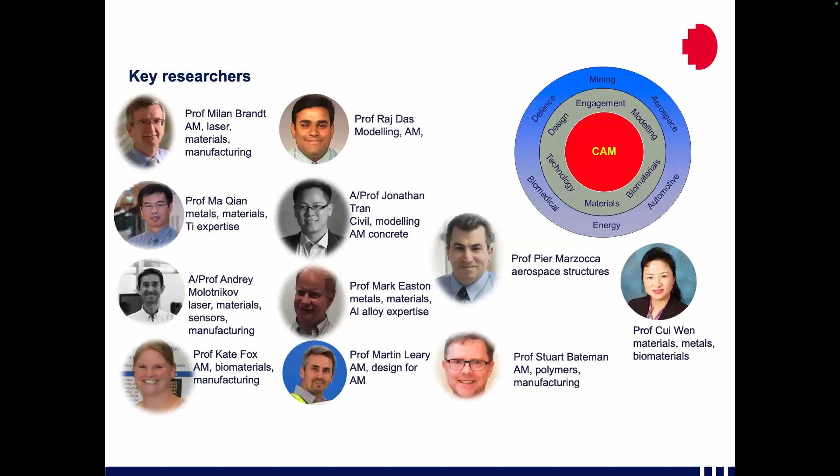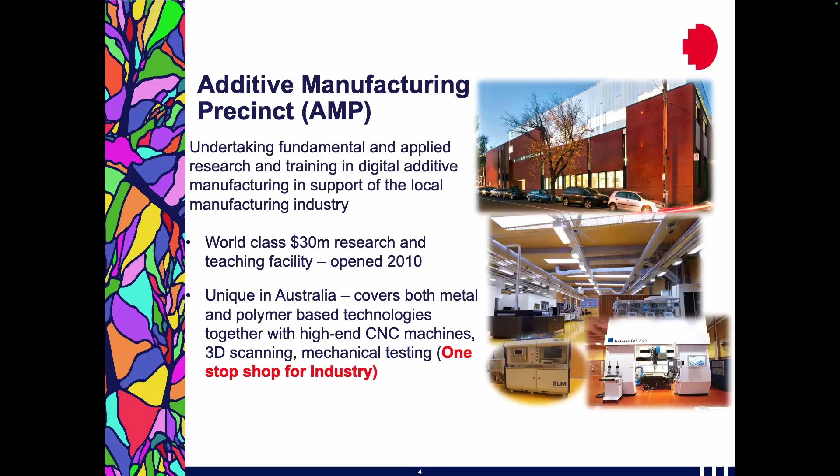These are the research areas I've worked in over the past two decades since my PhD: fundamentally, coupled solver algorithms, mesh-free finite element method development, coupled with damage mechanics and constitutive mechanics. In terms of applications, we've worked in damage tolerance optimization, dynamic fracture and impact response, and the new, fascinating area for our group — architected materials and metamaterials — all in the context of fracture fatigue behavior and how we can fabricate it using additive manufacturing.

In terms of application, we work a lot with aerospace industries. Multifunctional lightweight structures is one of our key research applications, coupled with, say, morphing structures and morphing wings, basically focused towards aeronautical and space applications.

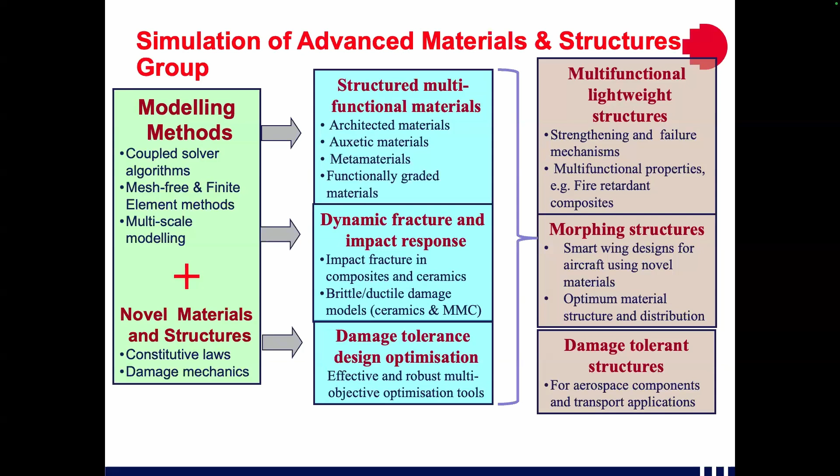With that background, let's talk about the focus topic, which we can only cover in one plenary. We are looking at aluminum alloy, particularly AlSi10Mg, a common additively manufactured material, because our focus is customized, just-in-time manufacturable aerospace components. That's why we're focusing on aluminum alloy. There's been a lot of attention on AM titanium alloy because of its use in high-end applications, but aluminum alloy has received less attention, particularly because of its not-so-good properties. But we have to make it good, and we have to use it in aerospace — there's no escape from that. That's why I'm focusing on this material for today's presentation.

The challenges in fatigue, particularly AM fatigue, include complex net shape design, just-in-time production, and many other fields where fatigue is very important. We see growing application in aerospace and automotive industry, so we can't deny the role of additive manufacturing, and the components manufactured need to be certified for structural integrity and fatigue life assessment.

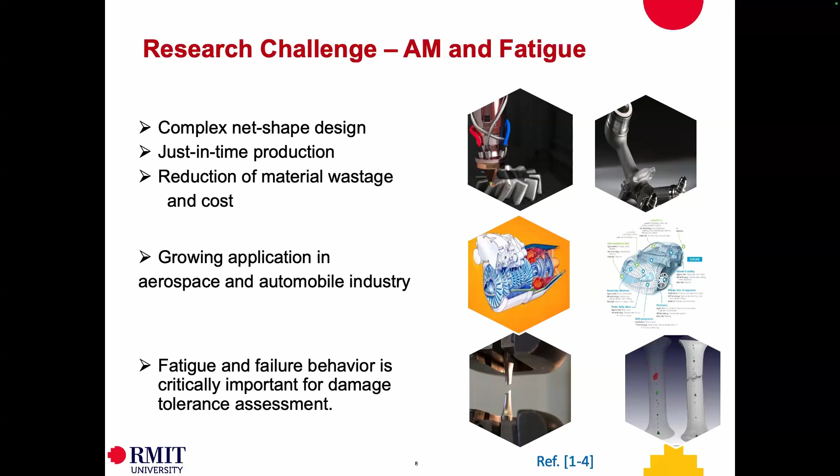Now let's present the whole summary in one slide, what the problem is. We are interested in cyclic properties, and we all know in additive manufacturing we can control parameters like powder properties, process parameters, heat treatment, machining, and post-processing parameters. Normally, we'd like to link our process properties with the cyclic properties, but additive manufacturing brings certain complications and challenges in this layer. We are looking at how these parameters contribute to defects, microstructures, surface roughness, residual stress, and anisotropy.

This is what I'm going to unravel in today's presentation. Particularly look at these arrows: powder properties affect defects on microstructure, heat treatment would affect defect, microstructure, surface roughness, residual stress, anisotropy - all of it. And same does machining affect surface roughness.

Process parameter affects defects, microstructure, surface roughness. Now, when I say affects, in some cases, the same process parameter will produce a defect which will affect things negatively, reducing fatigue life. But the same process parameter can produce elongated microstructure or coarsening of grains, which can actually improve fatigue life. So look at that point - the same process parameter can produce two effects: one improving, one decreasing. So they are synergistically opposite.

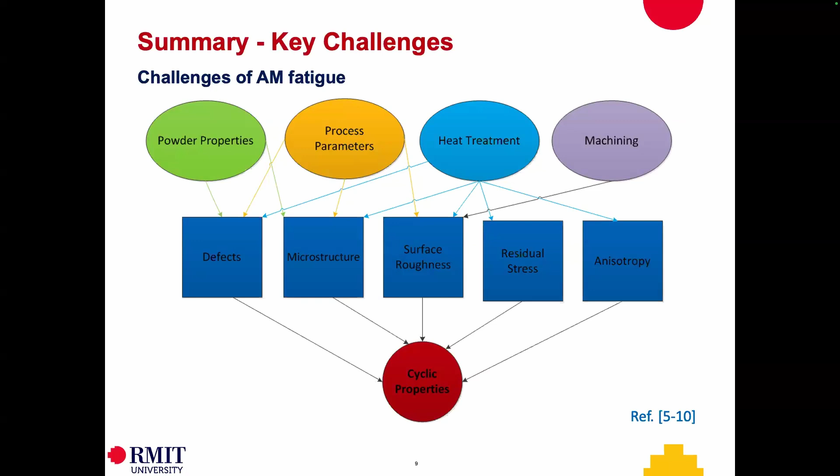That brings the challenges of optimizing these parameters to maximize our fatigue performance. So that's what we need to focus on when we deal with additive manufactured components, particularly aluminum alloy in this case. Let's look at a few systems which we are focusing on. I won't go in detail because I believe most of you in this room are familiar with that.

Now, our focus, the process I'm focusing on today, is powder bed systems. We have powder bed, powder fed, and wire fed systems. We are looking at the powder bed system for our lab, and we use that a lot to make additive manufactured components - basically you have a powder bed, a laser scanner, a chamber, and you put a laser beam to locally melt the powders to form the parts, and you raise or lower the bed plate to form the part continuously.

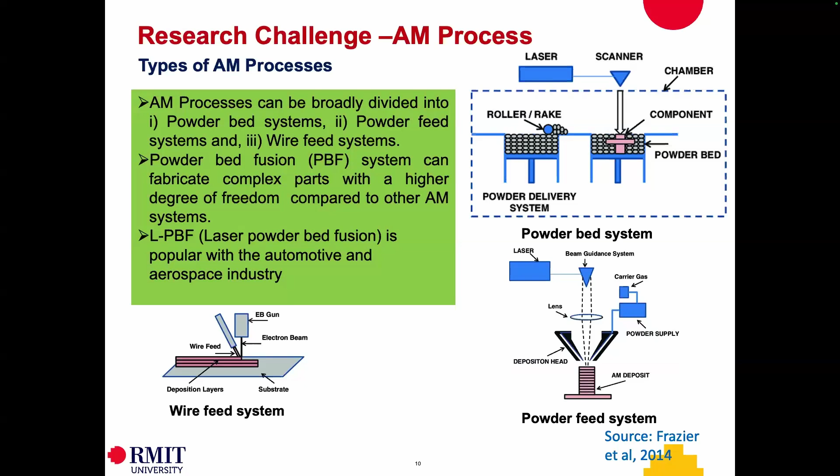So these are different types of powder bed - that's the powder bed system. There's also powder feed, where there are hoppers through which the powders are fed, and there is additive manufactured deposit, and the laser power will melt the powder and solidify it in situ as it progresses. So let's go forward - I would skip some of the initial background slides, because I want to get to the right points of what our results are and what mechanisms we do understand.

So why are we focusing on aluminum alloy? As I said, they have great ductility, high strength to weight ratio, good corrosion resistance, weldability, low thermal expansion, and so forth. This is a material of choice, particularly for aerospace. We can do complete melt and solidification of powder. We can produce customized material and good mechanical properties.

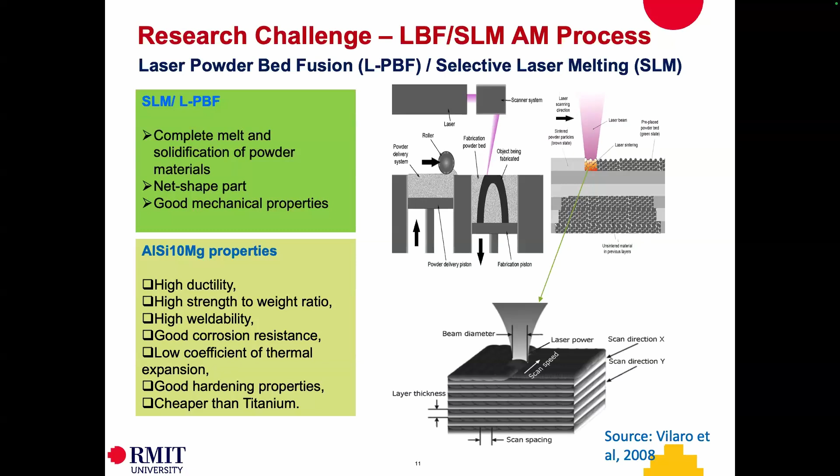So if you have an aircraft and a part of a landing gear is broken, we won't use aluminum for that, of course. But if any other component is broken, like a bracket, you can send a CAD file immediately in an automated way, and it can be produced within a couple of hours. That's not possible with the traditional part storage system we use, and that's the attractiveness.

Now let's look at the first research challenge, the process parameters, where we can control powder quality, laser power, scan strategy, build orientation, and layer thickness.

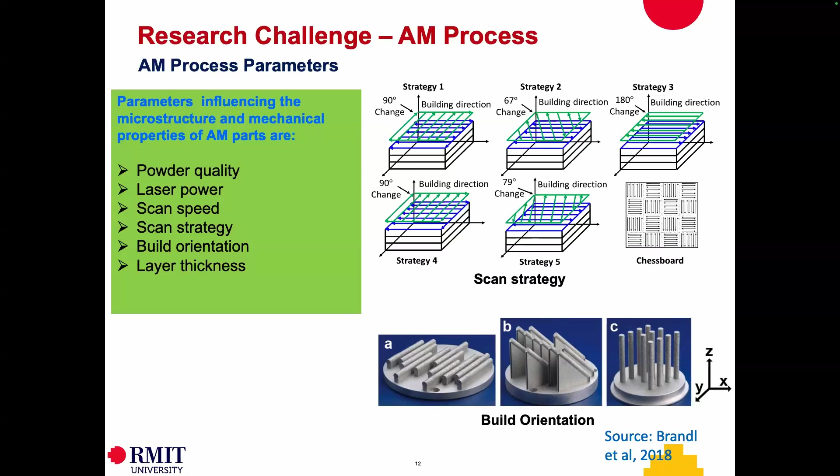As you can see, the same component can be produced with a 90-degree build, a 90-degree scan strategy, or 67-degree scanning, or 180 which is completely opposite, or 79-degree, or any angle whatever. So the scan strategy coupled with the build orientation - whether you build along X, Y, or Z axis - will be the first point which will change and affect your part, and can produce a controlled or uncontrolled anisotropy in some cases that we need to deal with.

So the second point, obviously, is the defects that are produced, sometimes inherent to additive manufacturing - these are gas pores, lack of fusion pores, and surface roughness.

The gas pores normally happen due to entrained gas porosity. Sometimes we can get lower keyhole pores - if your scan speed is too slow, you get porosity, but often at a faster scan speed you can get the higher keyhole pore. So there is no good solution with scan speed - you have to optimize depending on what type of pores you want, but you can't escape from pores completely. So that's the key point to note. So scan speed will either produce lower keyhole, or if faster, higher keyhole pore. You can see some examples here.

Now, lack of fusion happens due to poor bonding. Because of unmelted metal powders which stay due to poor bonding, you can create what we call lack of fusion, and you can end up with these unmelted metal particles or agglomerates - we call them satellites. Now that's the type of defect we need to deal with when we are dealing with AM components.

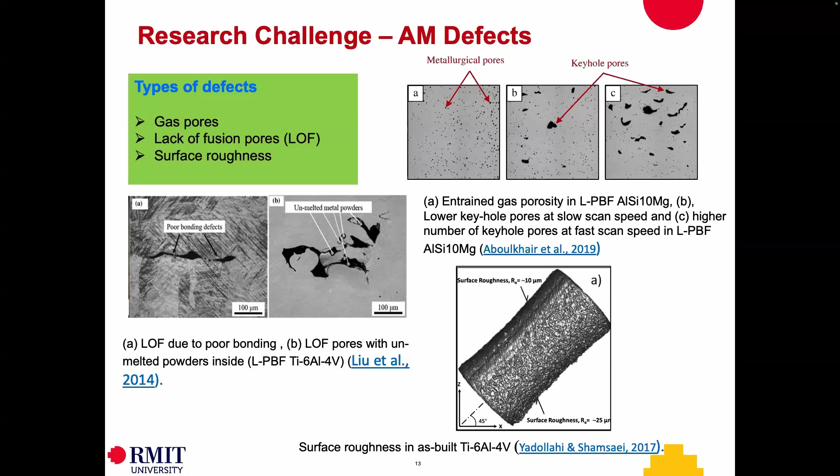Finally, the surface roughness, which is well known to us - surface roughness affects fatigue performance. The way the AM process affects surface roughness, we need to understand, and probably produce surfaces which are free from crack initiators or roughness defects. So these are kind of a summary of the challenges I've described.

Gas pores are spherical in shape. Normally, we are looking at 10 microns. It is normally due to moisture and sometimes entrapped hydrogen. A 50% reduction we can achieve.

One solution to the challenge is we can heat the base plate, which we should adopt. Secondly, lack of fusion pore is related to the scan speed. If we can optimize the scan speed, laser power input, and layer thickness, we can control the lack of fusion pore. Higher scan speed will cause incomplete filling, whereas lower laser input can cause unmelted powder particles. So a combination of laser input and scan speed in an optimized way can reduce the lack of fusion defect. These are the two parameters we need to focus on when using additive manufacturing.

The next factor is inert gas flow. If you don't have sufficient inert gas flow, it can also cause LOF defects in additive manufacturing components. Surface defects are features also affected by the build rate.

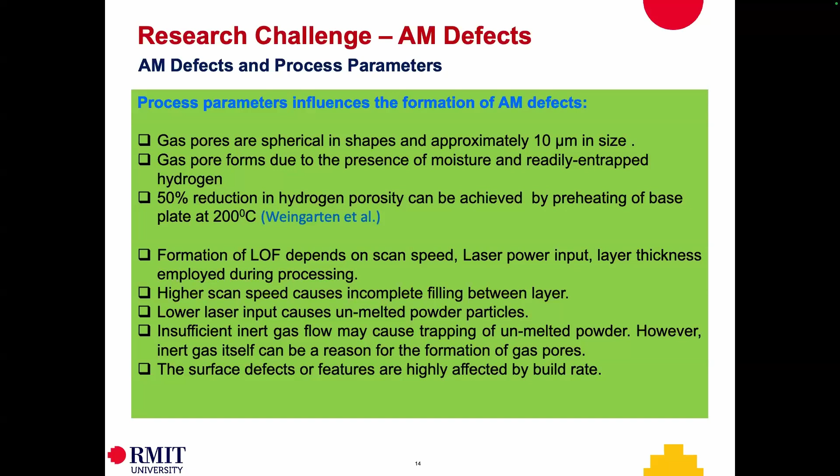Now, what is important from this slide is I would like to highlight the role of microstructures. This is an example of 3 different metals. First, Ti6Al4V, the titanium alloy. What we can see is the typical wrought metal has globular alpha with alpha plus beta matrix, whereas the LPBF shows martensitic and columnar prior beta grain boundaries. That's typical of what we found in literature for this type of microstructure.

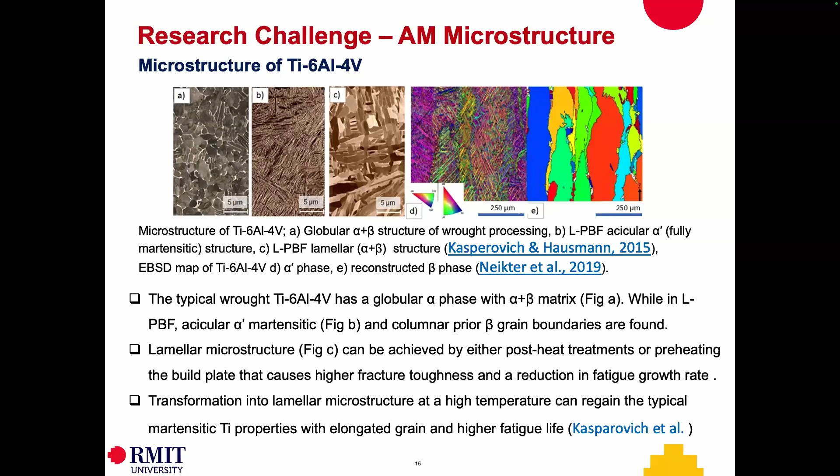You can achieve, within AM of titanium alloys, a lamellar microstructure by post-heat treatment or preheating the base plate. A preheated base plate acts as an in-situ heat treatment. Fine microstructure, particularly with as-built aluminum alloy, happens due to rapid cooling, which leads to high hardness, yield, and tensile properties.

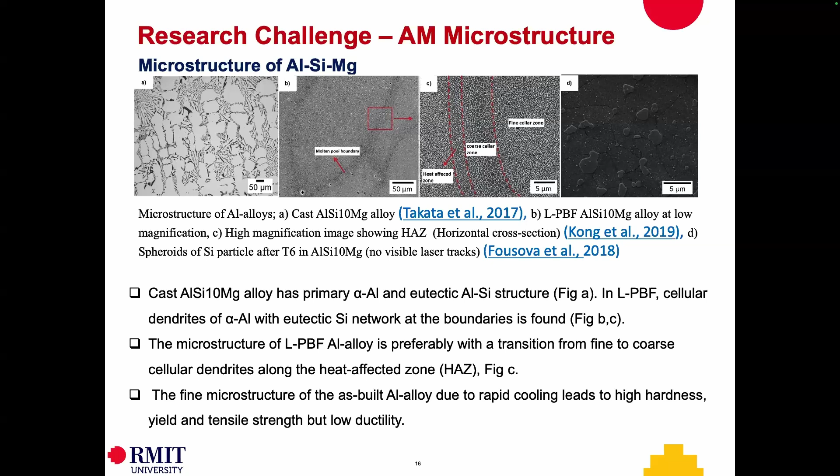Then, if we look at steel, which is a key focus for AM in different applications, normally we find a finer and elongated microstructure. Melt pool boundaries can easily be distinguished. But if we use suitable heat treatment, we can make the laser tracks disappear, so coarsening of the microstructure happens farther from the build plate. So what we get for steel in the literature is a gradient microstructure: fine-scale close to the build plate, becoming coarser as we move further away.

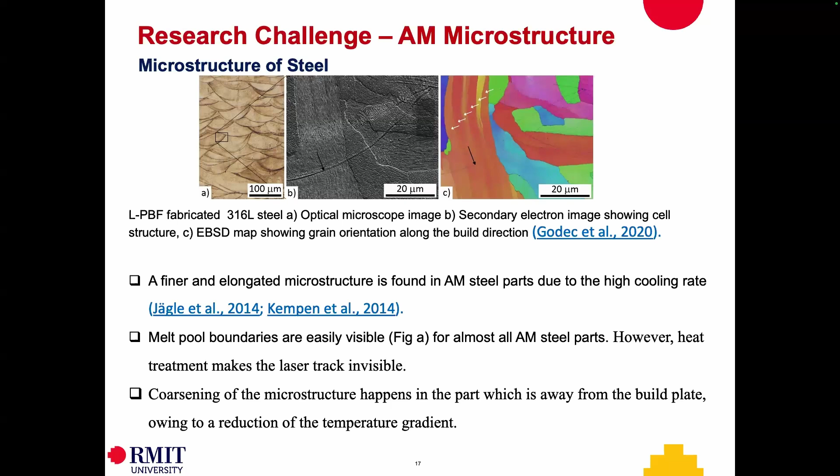Now, with these features, if we look at how it affects fatigue properties, here is a chart showing maximum axial stress versus different processing conditions: as-built, machined and stress relieved, machined and platform heating, platform heating, and machined and peak hardening. In general, looking at this diagram from these papers, with post-processing treatment, machining and base plate heating, we can improve fatigue life by roughly 50%.

Now, if we combine different post-processing treatments, such as peak hardening and machining, we can improve fatigue properties significantly. As you can see, across all these cases, machining increases the maximum axial stress for fatigue life. And where we combine machining with peak hardening, you can get significantly higher maximum axial stress.

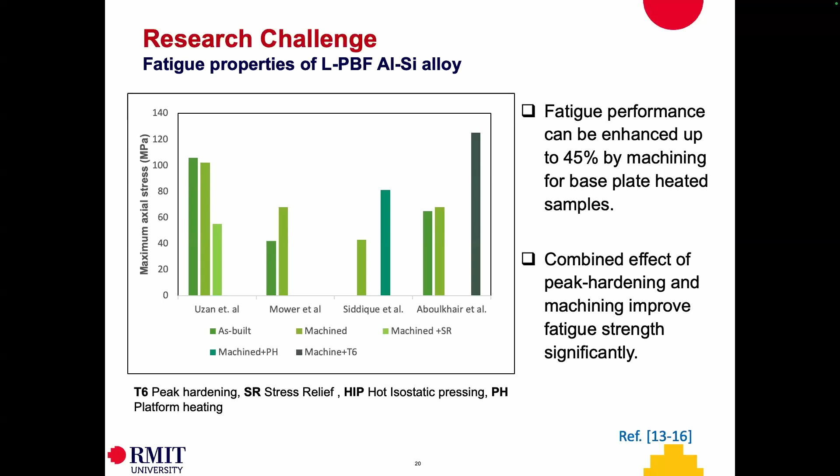Now, this summarizes what we found so far in the literature. We are going to explore what happens for these effects when we look at our target alloy, in this case AlSi Mg, in the context of additive manufacturing. That's coming up next.

What we found are the controlling factors: surface roughness, porosity, microstructure, and anisotropic residual stress. These are the key parameters of focus, the major parameters to which fatigue life is highly sensitive.

Surface roughness: crack failure initiates at the surface or subsurface. If we do machining, we can improve fatigue life, but one problem is higher scatter, which we'll discuss in the rest of the presentation.

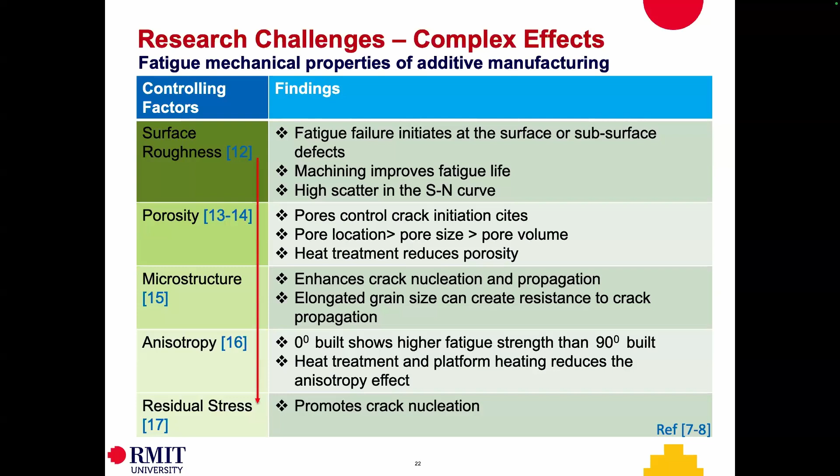Porosity controls the crack initiation sites, but it has a magical effect, as you will see later. Out of the three things—given pore's location, size, and pore volume—the location has a greater effect than pore size and pore volume. We tend to think a larger pore will significantly reduce fatigue life, but it's not always true. A pore could be spherical or a different shape, and that will control the fatigue life. Now let's look at what happens with the build direction.

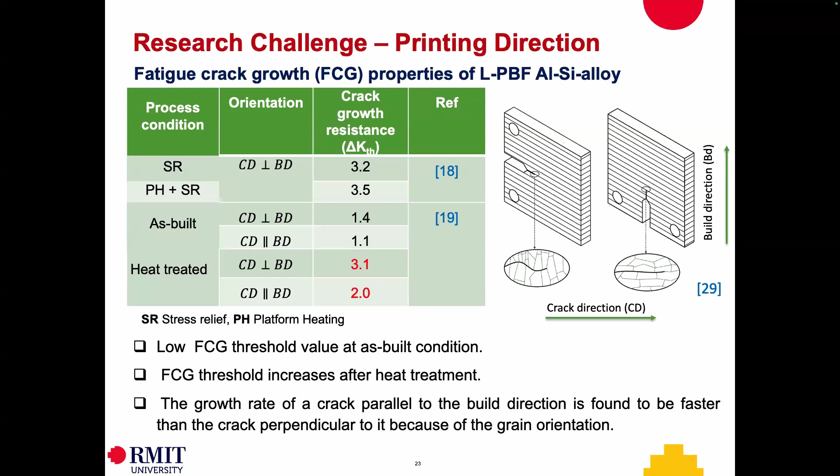First, the printing direction is an issue. In general, what we found is that if the printing direction is parallel, or at 0 degrees, with the crack growth direction, we get a lower fatigue life and lower fatigue threshold, as seen across all these cases. But you can use heat treatment or other post-processing treatment to improve the fatigue life. That's the challenge and how we overcome it, by controlling the printer.

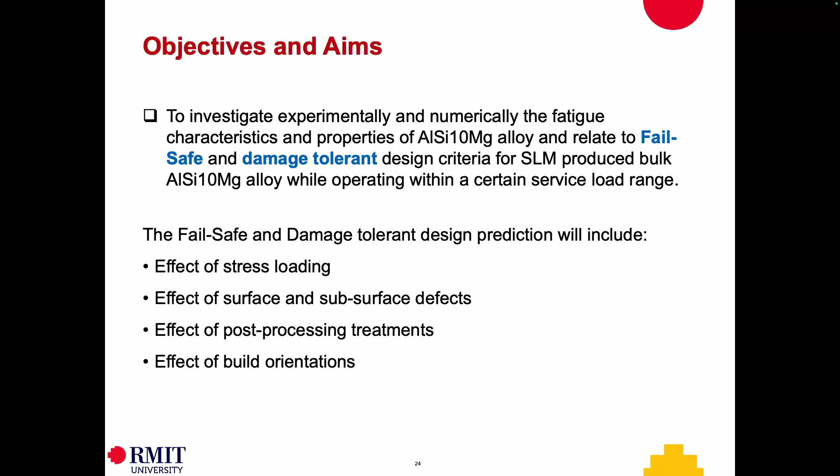Our main objective is summarizing what we discussed about printing direction. The key parameters are stress loading, surface and subsurface defects, post-processing, and build orientation. Our whole goal is to understand how the size and types of AM-induced defects, such as surface and subsurface defects, and fatigue conditions like stress ratio, affect fatigue strength and crack growth threshold properties.

This is an important factor we want to understand, because post-processing is often used. Having known our first objective, if we apply post-processing techniques, the next step was to look into the effect of post-processing conditions on fatigue life and how we can improve them.

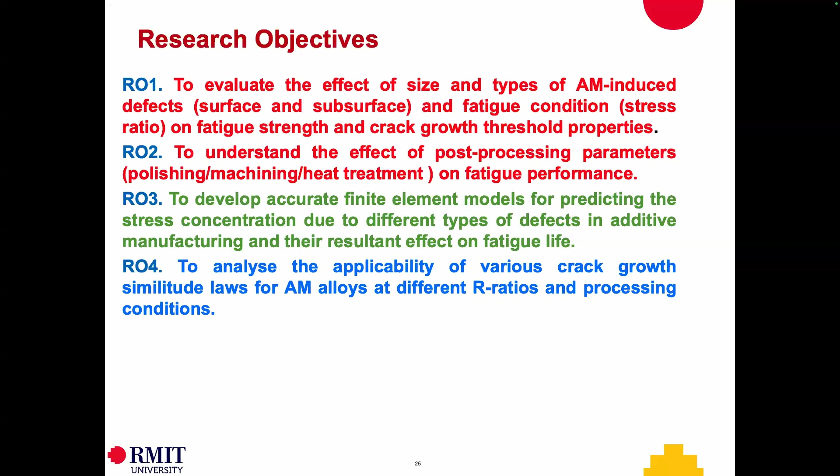The green was the digital world, which we have worked a lot on. We have developed a multi-scale finite element model to understand damage accumulation due to fatigue and how it affects fatigue life.

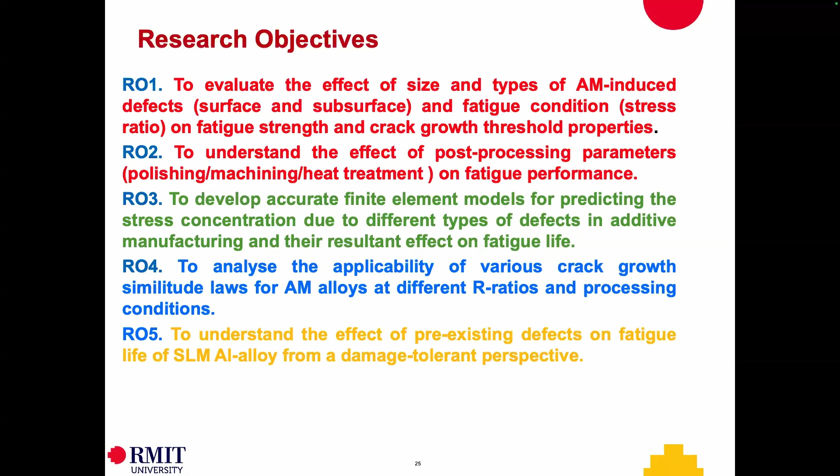Finally, we looked into what we call quick fatigue prediction for AM alloys using the so-called similitude laws, which are popular fatigue laws in literature. You can relate different alloy properties, and based on one data set, you can develop another curve.

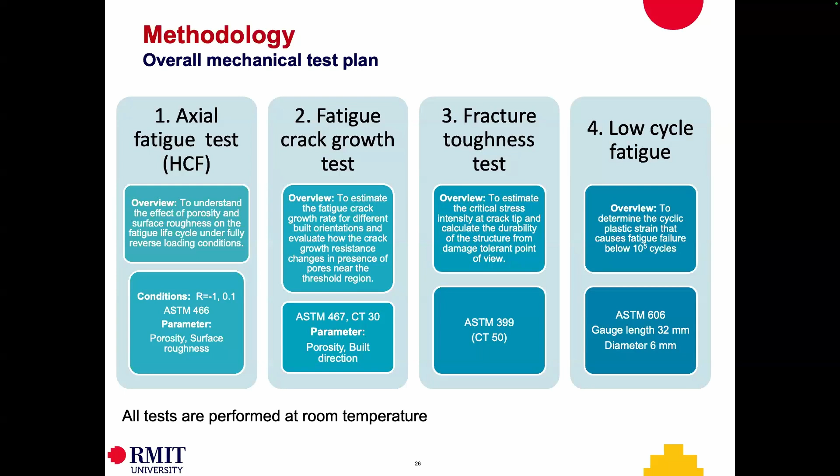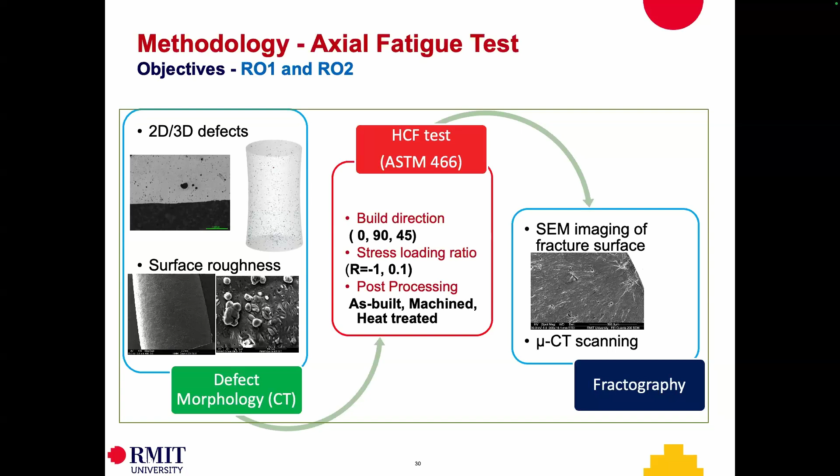We looked at 2D and 3D defects with CT and SEM, looked at surface roughness with a profilometer, used different build directions, a series of 0, 90, and 45 degrees, two different load ratios, completely reversed and positive loading, and we looked at as-built, machined, and heat-treated conditions. We did detailed SEM scanning of the material. This is the different equipment we used.

Let's talk about what we see in the build orientation. So the first challenge I mentioned was build orientation, and what we saw there.

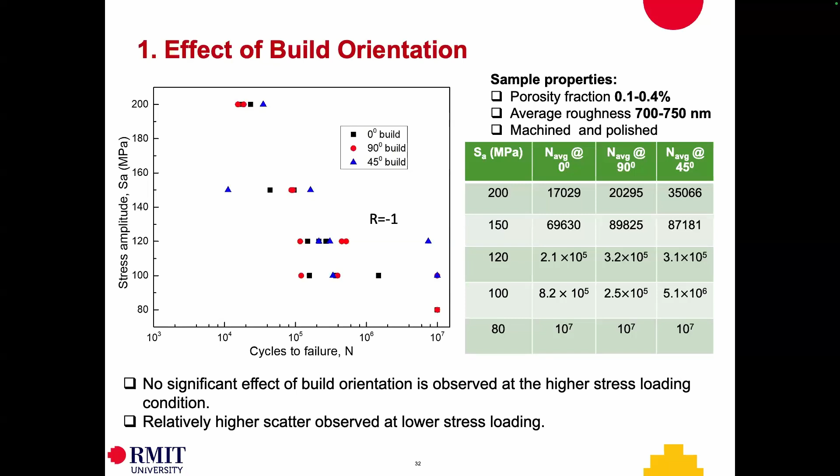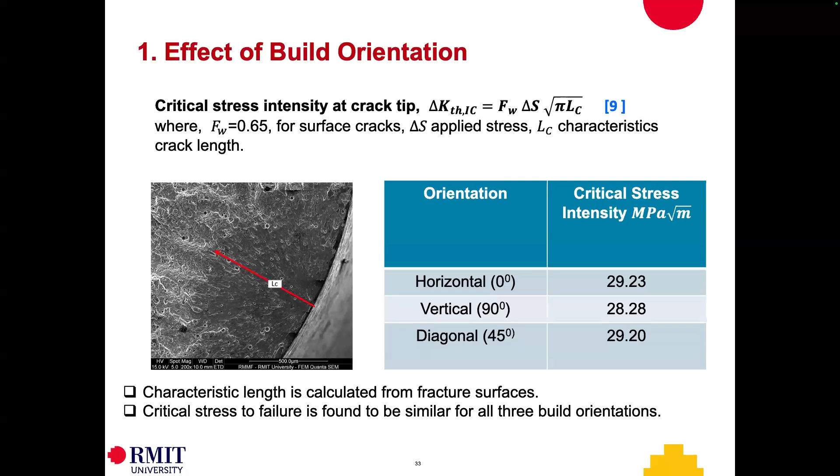You eliminate all the fatigue issues coupled with surface roughness. But in our case, porosity was very small, so there was no effect of porosity. But if you have large pores or multiple pores, even if you remove the surface roughness effect, you may not get the right answer. You may still get a lower fatigue life. So coupling of different defects is very important.

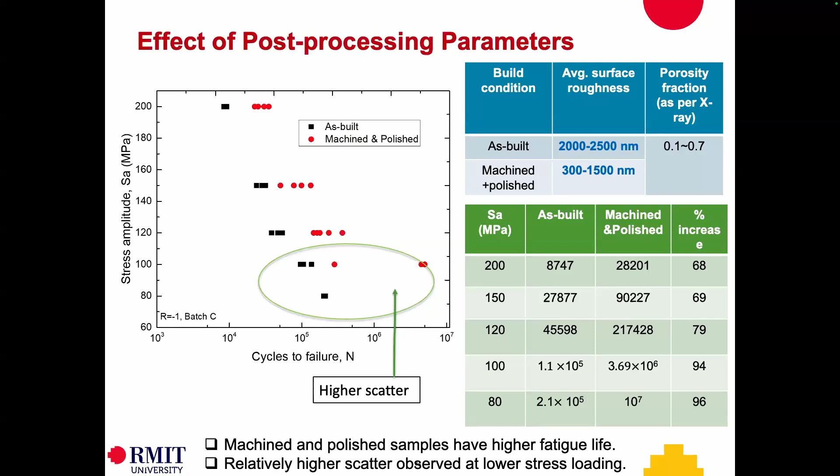So poor surface quality of as-built samples is causing early failure, but this surface quality is affected by these defects, which are lying in the proximity of the surface. They even make things worse by causing fatigue crack to initiate from the surface from one or multiple of these different types of defects.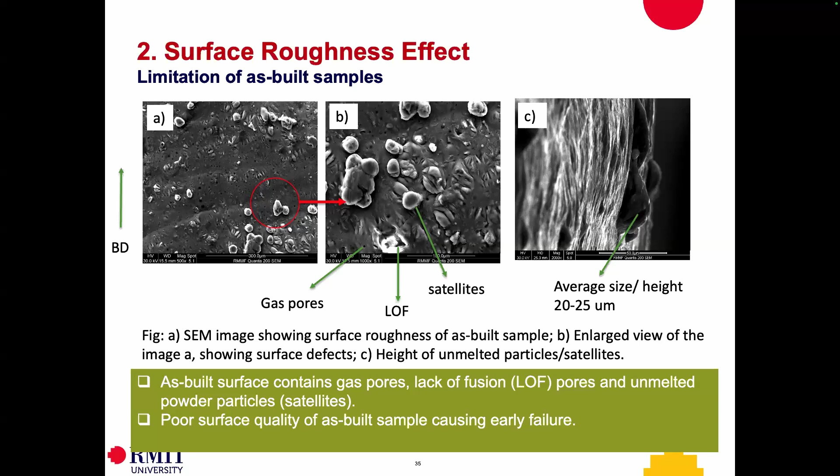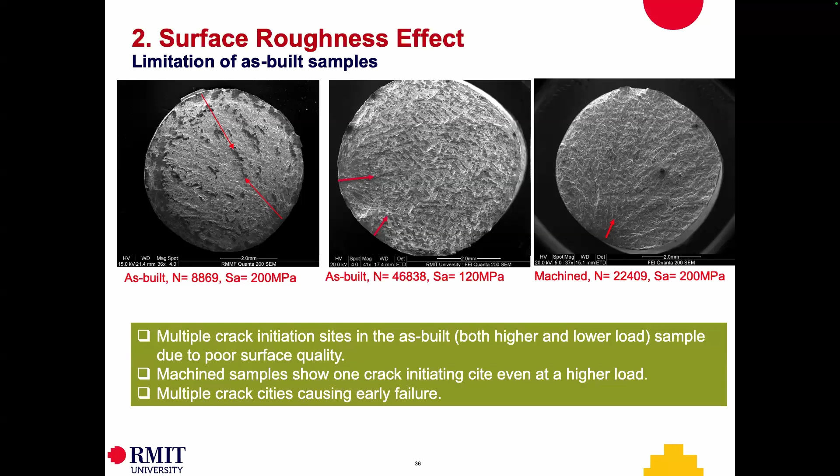If we look at as-built sample at a lower stress amplitude, even in that case you get a higher fatigue life, but still we are dealing with multi-site failures, which could be an issue. So multiple crack initiation sites in the as-built sample due to poor surface quality, and that is causing fatigue life loss. Even at a higher load, machine surface is normally controlled by a single crack, maybe 1 or 2 cracks, but not multiple cracks certainly.

So this is a summary of the effect of post-processing.

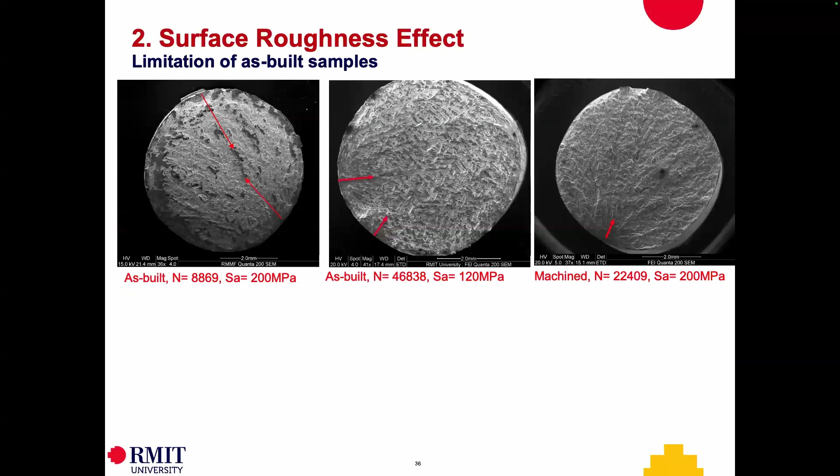Now we looked at the porosity fraction. Higher percentage of near surface pores we are observing in as-built samples. If you have a machine surface, the porosity fraction goes down. Looking closely at the surface, as-built sample has a much larger fraction of porosities, 2.5, as opposed to machine surface, where the porosity is only 1%. This shows that by reducing the porosity, you are actually improving the surface quality and fatigue performance of this AM component, which is a critical factor in our AM-based material design.

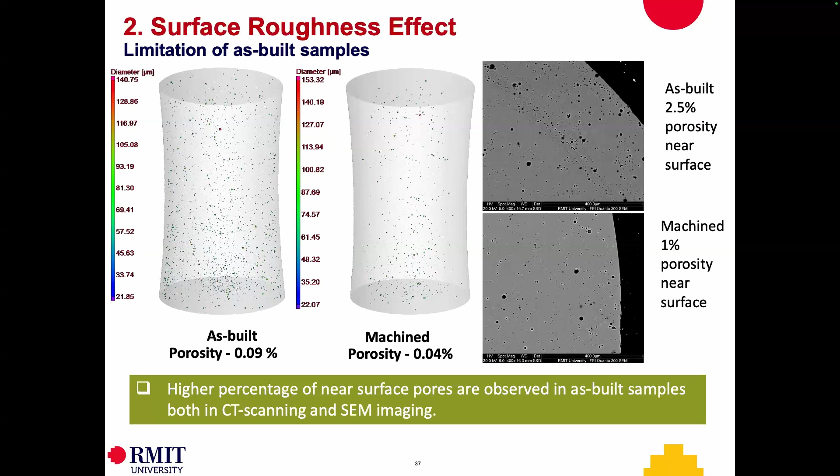So let's move on. This is the summary of what we have learned from our experiment, and analysis of data about how the post-processing parameters affect as-built and machined samples.

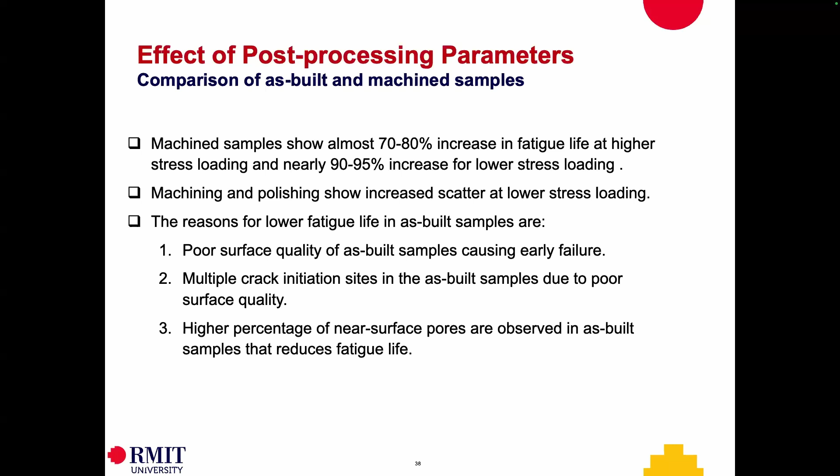Machined sample shows about 80% increase in fatigue life, and for the lower stress loading it can double, 90% increase, but there is an increased scatter at the lower stress loading, which you have to take into account in your design. Finally, the surface quality is the key factor which causes early failure. Multi-site crack initiation in as-built samples is a serious problem we need to address. And the large numbers and fraction of pores in the near surface also cause the failure. So this is a summary of what we found.

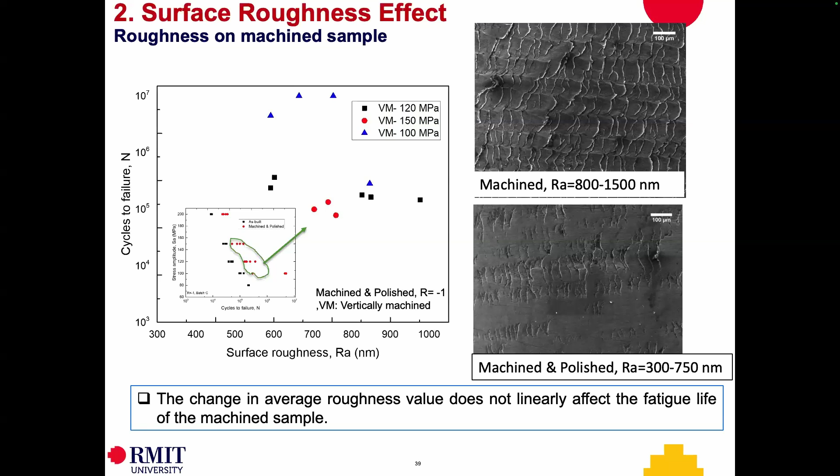Then we looked at surface effect in more detail, machined versus machined and polished, and these are vertically machined samples. What we found: the change in surface roughness value, there is no easy shortcut linear way to scale or apply similitude to predict the performance. You can see it's scattered all over the place. At a higher loading, you can observe some close values, not so scattered, but at a lower loading, such as black dots, the roughness values are very much scattered from 500 to 1,000, but the fatigue performance are nearly the same. So it doesn't scale linearly with the roughness.

This is a summary which summarizes the data from machined and polished for these 4 stress amplitudes. With the as-built, you can see they clearly have a low fatigue life. There is no simple relationship. Significant variability was observed in surface roughness and corresponding fatigue life. With the machined and polished samples, with similar roughness values, shown as solid black squares, the fatigue life can be at least 70% variable. Even the samples we tested at maximum stress, the red dots here, have a similar fatigue life, although there is significant variation in roughness.

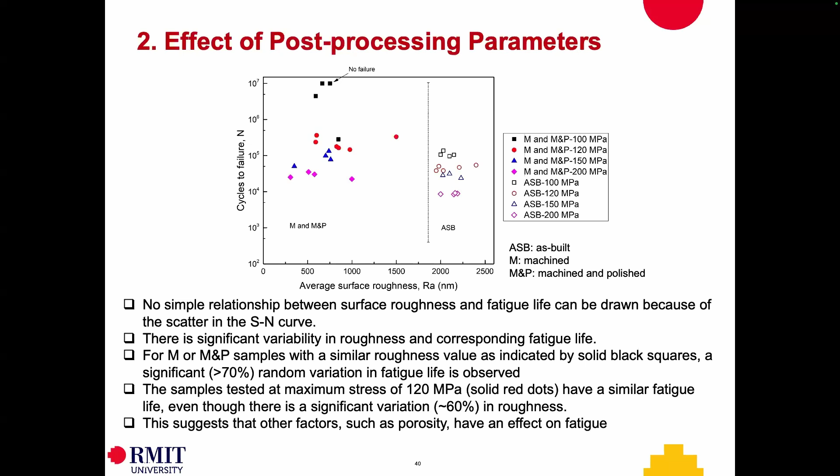It can be two ways. Significant roughness variation can produce similar fatigue life, or quite different fatigue life for very close roughness. So we can have not a really good correlation, as you see with the diagram.

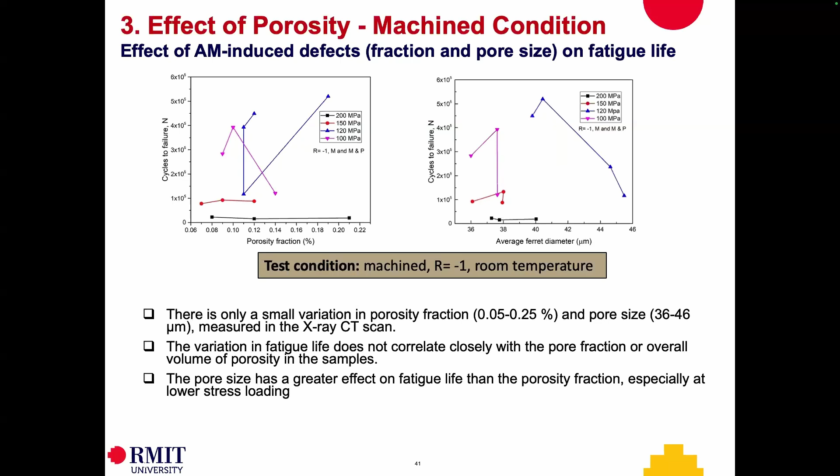Very small variation of porosity fraction and pore size. The variation of fatigue life - this is a key message - doesn't correlate closely with the pore fraction or overall volume of porosity. The pore size we found to have a greater effect on fatigue life than porosity fraction, particularly at lower stress loading. So why is all this happening?

What is the problem? What are we missing here? What's the missing link? This is the missing link: fatigue is controlled by what we call notorious pores - a local effect.

Look at these two data. Same roughness roughly, same porosity fraction, same stress amplitude, but on the right-hand side we have a fatigue life which is double that of the left-hand side, 143,000 as opposed to 300,000. What makes the difference is the defect which causes fatigue failure, particularly if you have a single site failure.

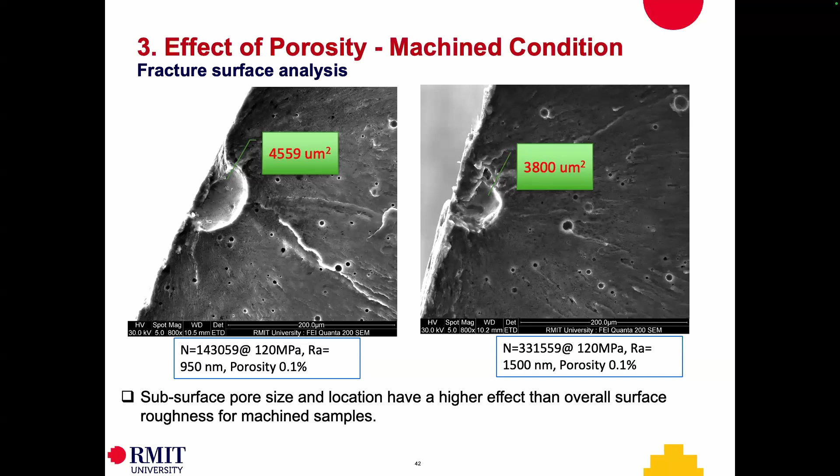This area, the effective area, is 4,500 micrometer square, 3,800, and that is so highly sensitive and makes a difference in fatigue life. So this explains a lot of the scatter, a lot of lack of correlation we observe between surface roughness and fatigue life.

Let's summarize what we found, what lesson we learned in this diagram. We considered the porosity effect at low stress level because higher scatter is found in this region. That was our problem - we couldn't relate with porosity very well.

And what we find here - look at this diagram, vertically built and horizontally built - for the same stress amplitude, if the pore size is smaller, you get a higher fatigue life. Very good news: same stress amplitude, pore size smaller, as dotted by the circle, you get a higher fatigue life. However, look at that solid and hollow pores.

If the pore is close to the surface - same pore size - a subsurface internal pore is less critical than a surface pore. If the pore of the same size is on the surface, it will give you lower fatigue life. If the pore is internal, although the stress level is the same, you get a much higher fatigue life, and that happens both in horizontally built and vertically built cases.

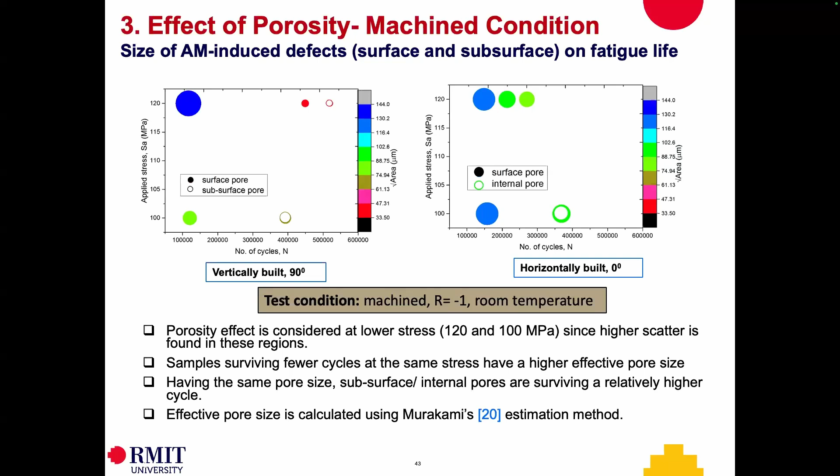Then look at this one - we are almost closing. One point we often ignore in fatigue performance, particularly for additive manufactured cases, is the shape effect, which we found to be critically important and is often not considered.

Look at these two cases. On the first row we have gas pores compared with lack-of-fusion pore at a high stress level, 120. A lack-of-fusion pore, which was the critical defect, produced a fatigue life of 100,000, whereas the gas pores produced 5 times more. The same happened at the lower stress level, lack-of-fusion pore versus gas pore - with the gas pore, fatigue life is at least 3 times higher.

Why is it? We know lack-of-fusion pores are notoriously tortuous, arbitrarily shaped, and have a lot of local stress concentrators embedded within the pore, which becomes highly fatigue critical and can give rise to a crack, propagate it, and initiate and propagate the crack at a much lower load. It can significantly lower the fatigue resistance, as we found here.

So very tortuous lack-of-fusion pores are more critical compared to gas pores, and that is the key effect why we find at lower stress amplitude a high scatter with porosity, because of the shape of the individual critical pores which is causing the fatigue failure.

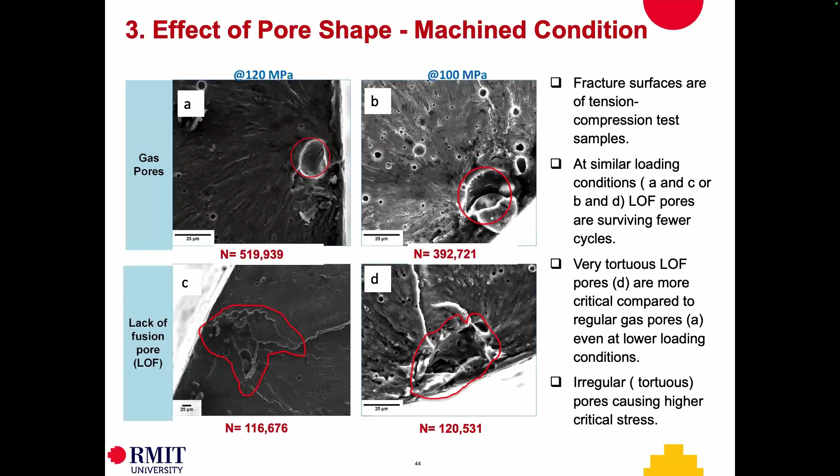Finally, I'll finish up with the last item we talked about: the stress loading ratio. We looked at tension loading and tension-compression loading. This is a very familiar curve for us - the fatigue life will decrease in a log-linear fashion.

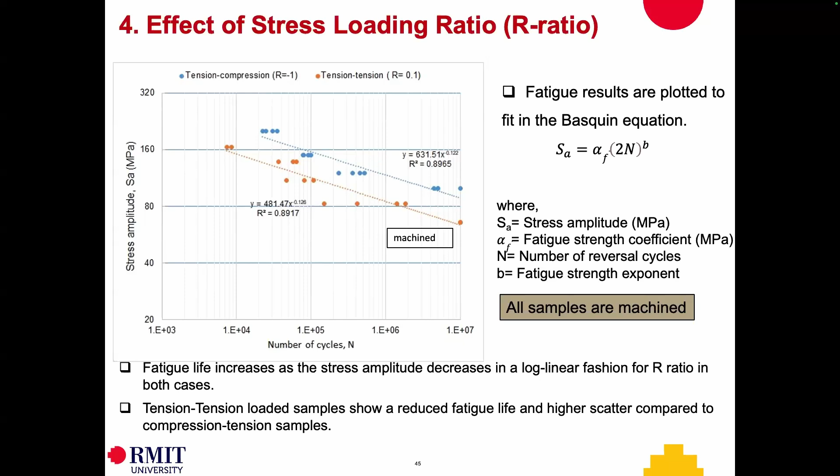But the important thing is tension-loaded samples have a reduced fatigue life and higher scatter compared to a compression-tension sample. Why is it? We all know the crack closure effect, and in this case we talk about a pore closure effect.

So if you have a compression sample, R -1, you can see compared to this CT diagram, many of the pores are closed and not visible below threshold. Whereas if you have a tension loading, you see a reverse effect - the pores are opening and you get more pores.

This is kind of summarized - pore frequency with a ferret diameter. As you can see, before the test and after the test, the porosities are reduced. The critical pores, the lower diameter pores, are more reduced. You can see the blue one is the initial and the red one is after compression, after you load it - it's reduced, the lower pore is reduced, whereas it's opposite.

If you have a tension loading, the blue and red line show the pores increase in diameter, and that is clearly demonstrated. Increasing count of tiny pores in tension fatigue test compared to before the test is causing this lower fatigue life for tension loading.

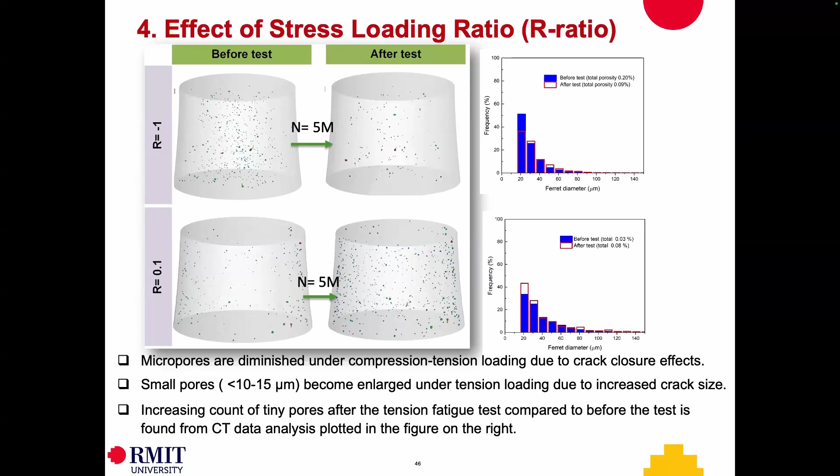This is another effect we can see going too deep into fracture mechanics, and this is the last slide or two. You can see for a completely reverse loading, tension compression, fracture surface, this is tension.

Look at the stable crack growth region and unstable crack growth region from the micrography. We can see crack nucleates at subsurface pores for both stress loading conditions, which is okay. The stable crack propagation zone B is higher than the unstable crack propagation zone C in the case of compression tension loading.

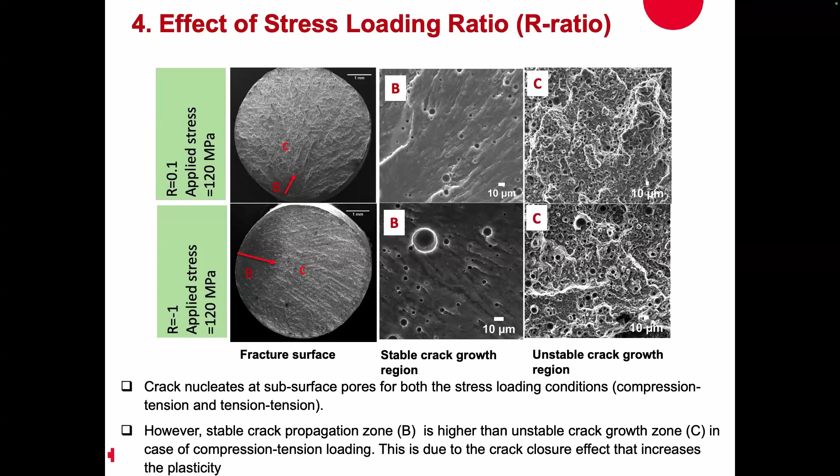This is due to the crack closure effect that increases the plasticity. The distinction between the stable and unstable crack growth zone between tension and compression causes the lower fatigue life for tension loading, which we need to take into account for AM. Finally, heat treatment - we studied heat treatment effect also.

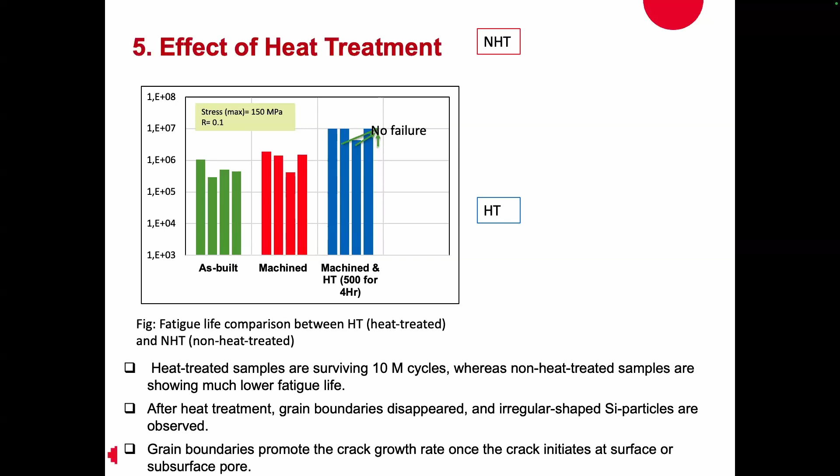It's relatively simple. As-built versus machine heat treated, you get no failure. Generally it's a universal finding: post-processing and heat treatment, peak hardening, machining, along with heat treatment will definitely affect and improve your fatigue life, which is a clear outcome. In this case we can see the clear relationship.

This is again due to the grain boundary. No heat treatment has got fine grains. If you have heat treatment, in this case we find it exposes a lot of silicon particles. So grain boundaries promote the growth rate once the crack initiates at the surface and subsurface pores.

Once the crack initiates from the surface, finer grain boundaries promote the growth, while if we remove it, this hardened silicon particle will cause crack growth - it will slow down and resist the crack growth. So this is what the heat treatment causes the difference.

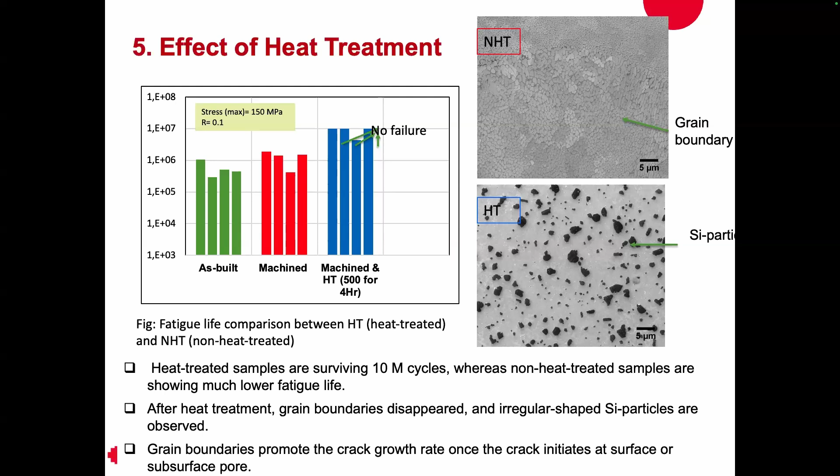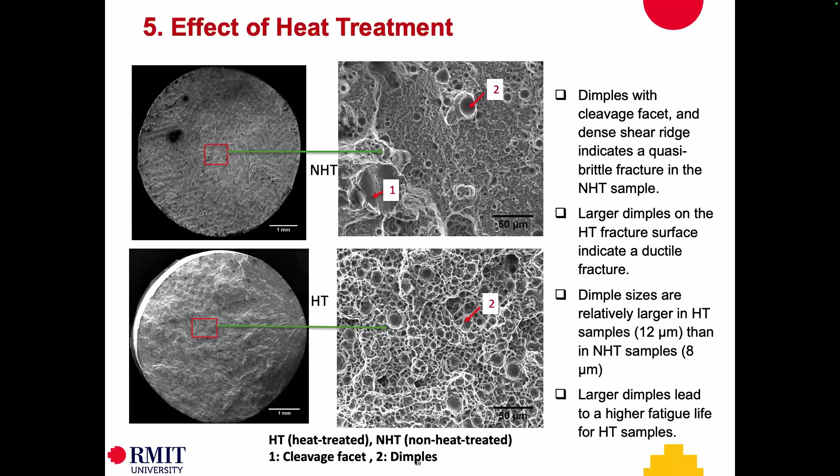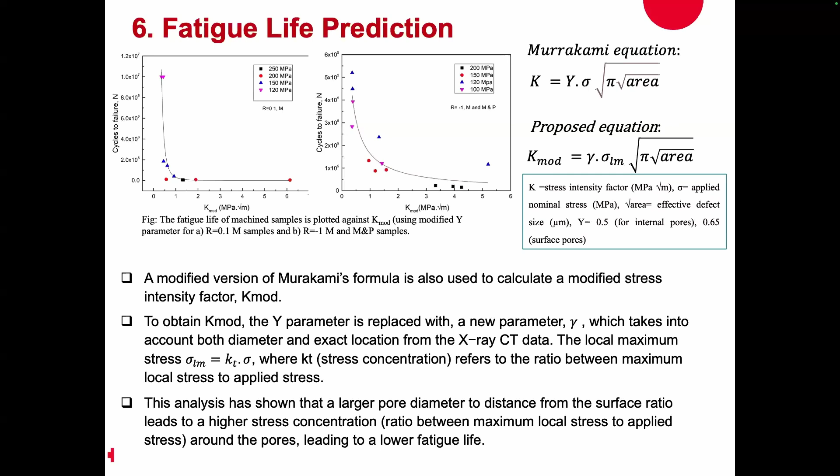So that's the summary. What we found in our work, particularly for the aluminum alloy as-built samples: the average surface roughness value acts as the key factor. If we use machine polished surface quality, subsurface porosity would be the reason we should pay attention to. The effect of porosity is controlled by location, size, and density, in that order.

So pore locations are critical, and we need to remove pores on the surface - that will significantly degrade the fatigue life. Finally, if we have more lack-of-fusion pores, that could be critical for us because they are much more critical than the gas pores, which are spherical. So lack-of-fusion pores could be a notorious defect, which can significantly degrade fatigue life.

Heat treatment is a great way to improve fatigue life and lower crack growth rate due to improved ductility, but the crack closure effect - the fracture surface for compression tension loading - will show more fracture and we'll have a higher fatigue life. So that summarizes the finding.